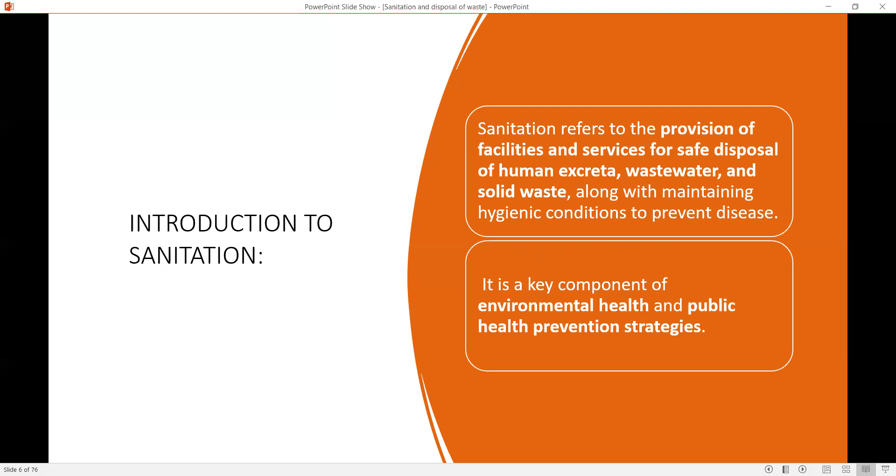Introduction to sanitation. Sanitation refers to the provision of facilities and services for safe disposal of human excreta, wastewater, and solid waste, along with maintaining hygienic conditions to prevent diseases. It is a key component of environmental health and public health prevention strategies.

Objectives: prevent spread of communicable diseases, protect water source from contamination, control vectors like flies, mosquitoes, rodents, maintain clean environment, and improve quality of life and dignity.

Next is solid waste and disposal. Solid waste refers to any unwanted product in our environment or from our daily items that is not a liquid or a gas. Improper disposal of solid waste affects the environment in many ways, such as pollution in air, water, soil, and blocked water drains.

It can spread diseases like dysentery, cholera, and vector-borne diseases such as malaria and dengue. Types of solid waste are municipal solid waste, non-municipal solid waste, and hospital waste or biochemical waste.

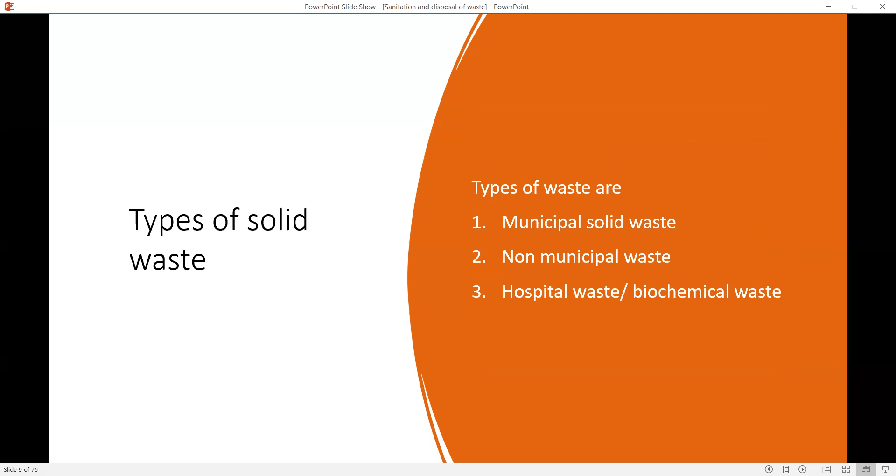Municipal solid waste includes all the items from homes and businesses that people no longer have any use for. These wastes are commonly called trash or garbage and include items such as food, paper, plastic, textile, leather, wood, glass, metal, sanitary waste in septic tank, and other wastes.

Municipal solid waste includes street waste, sanitation waste, construction and demolition debris, agriculture waste, institutional and commercial waste, and household waste. The composition of municipal solid waste includes metal at 9.5%, wood 8.3%...

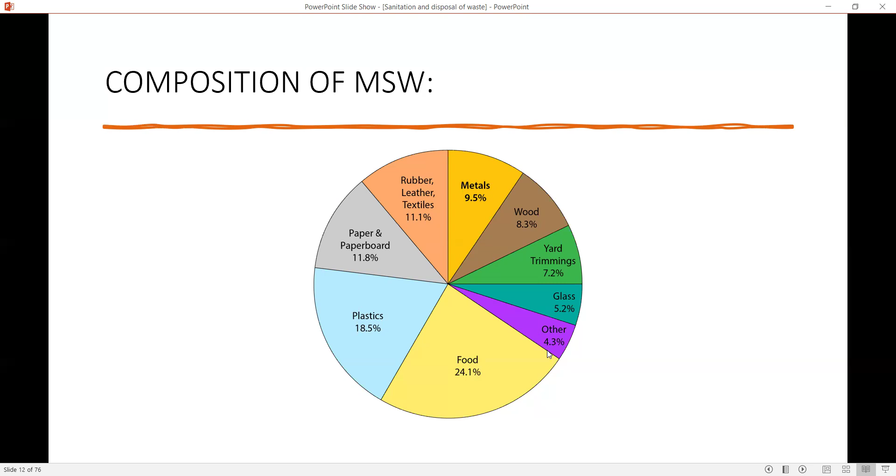...yard trimming 7.2%, glass 5.2%, food 24.1%, plastic 18.5%, paper and paperboard 11.8%, rubber, leather, textile 11.1%, and others at 4.3%.

Next is non-municipal solid waste: waste that is not created by community activities, residential or commercial establishments. It includes solid waste generated by the industries.

Next are the characteristics of solid waste, which are density, moisture content, size of waste constituents, calorific value, field capacity, permeability of compacted waste, compressibility, and chemical characteristics.

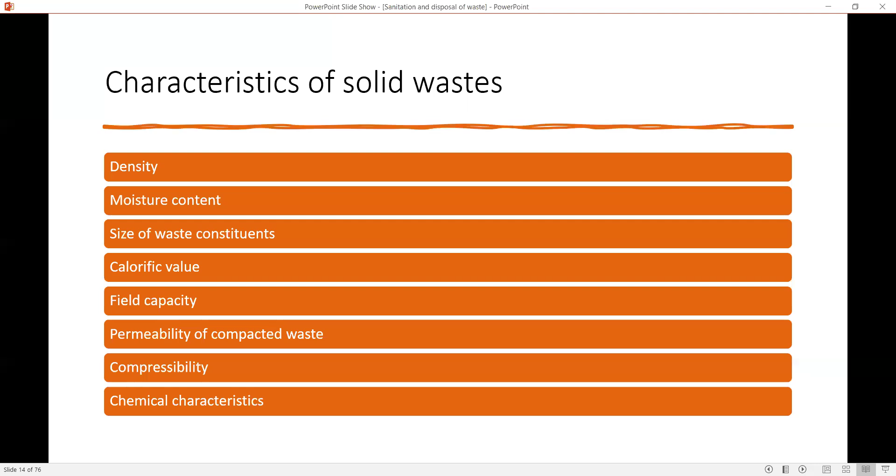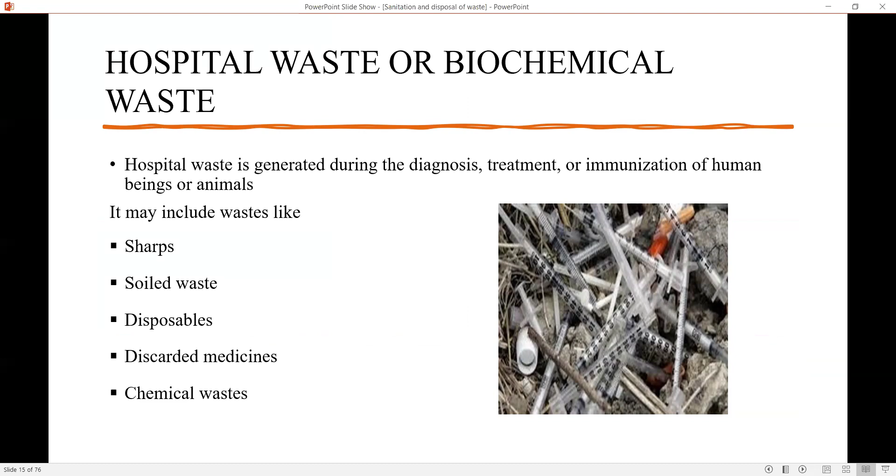Next is hospital waste or biochemical waste. Hospital waste is generated during the diagnosis, treatment, and immunization of humans or animals. It includes waste like sharps, soiled waste, disposables, discarded medicine, and chemical waste.

Next is the classification of solid waste, which is combustible or non-combustible, depending on whether they will burn or not. Depending on the inherent danger associated with its physical and chemical properties, solid waste can also be classified as either hazardous or non-hazardous.

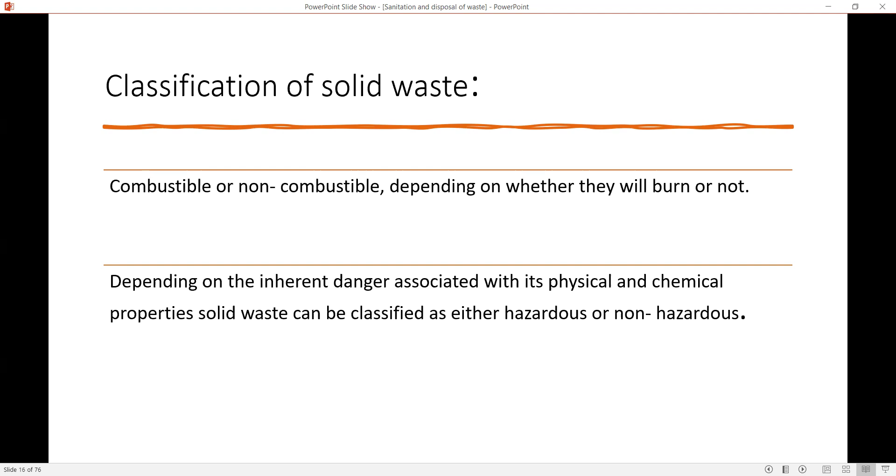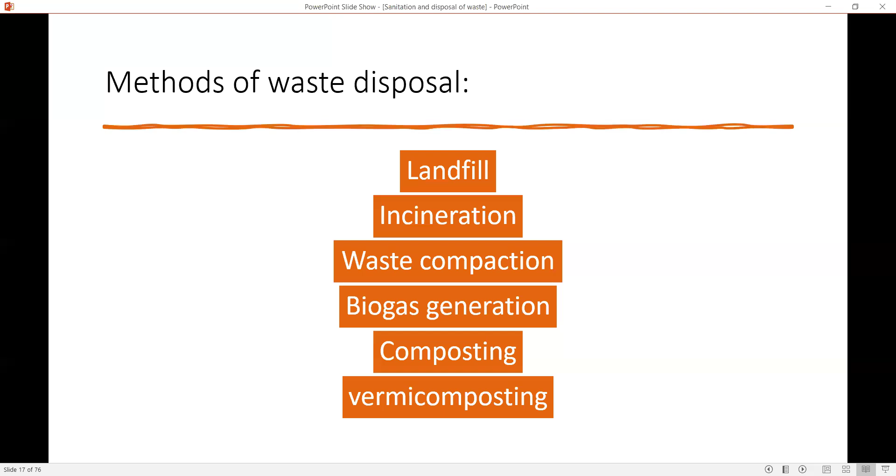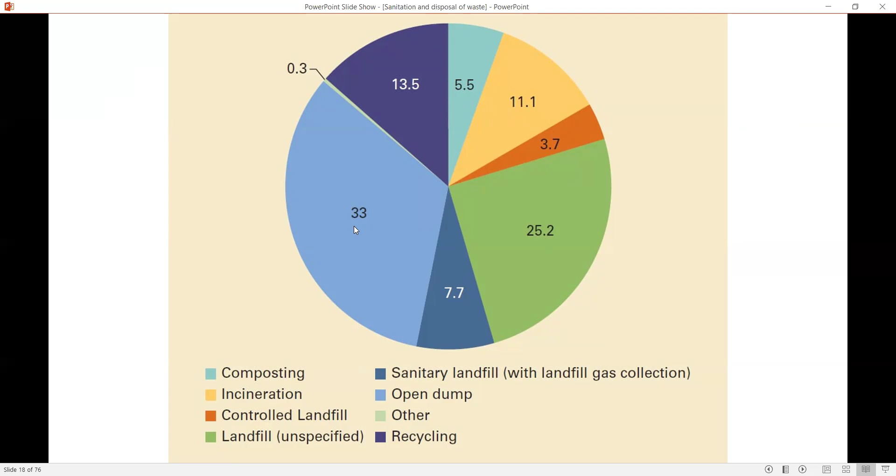Composting is 5.5%, incineration 11.1%, controlled landfill 3.7%, landfill 25.2%, sanitary landfill 7.7%, open dump methods 33%, and recycling 13.5%. So these are the methods: landfill, incineration, waste compaction, biogas generation, composting, and vermicomposting.

We will discuss these one by one. First is landfill. In this process, the waste that cannot be reused or recycled is separated out and spread as a thin layer in the low-lying areas across the city. A layer of soil is added after each layer of garbage.

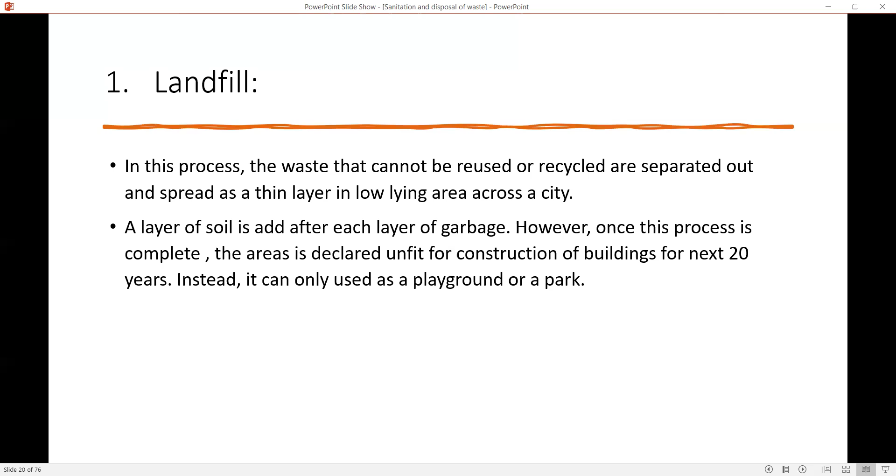However, once this process is complete, the area is declared unfit for construction of buildings for the next 20 years. Instead, it can only be used as a playground or a park.

Second is incineration. It involves controlled combustion of waste at a high temperature, converting waste into ash, gases, and heat, significantly reducing volume and weight. It is particularly useful for infectious waste, hospital waste, and hazardous material.

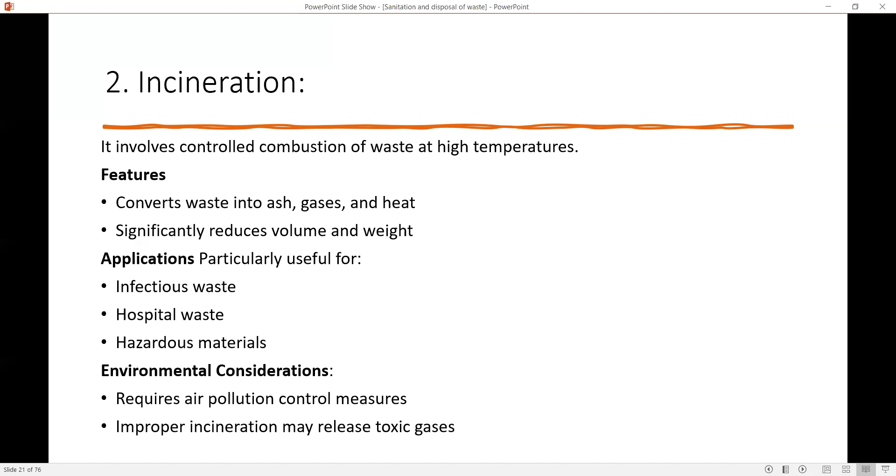Environmental considerations require air pollution control measures. Improper incineration may cause release of toxic gases.

This process reduces the volume of waste by 90% and is considered one of the most hygienic methods of waste disposal. In some cases, the heat generated is used to produce electricity. However, this process is not environmentally friendly due to the generation of greenhouse gases such as carbon dioxide and carbon monoxide.

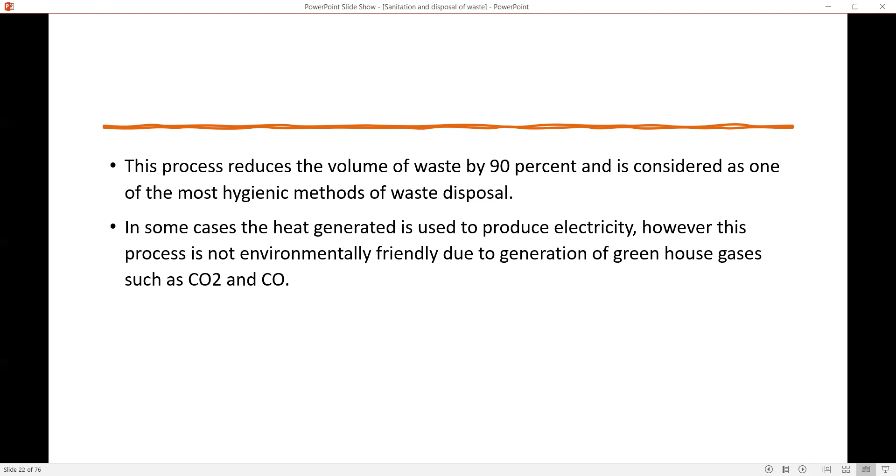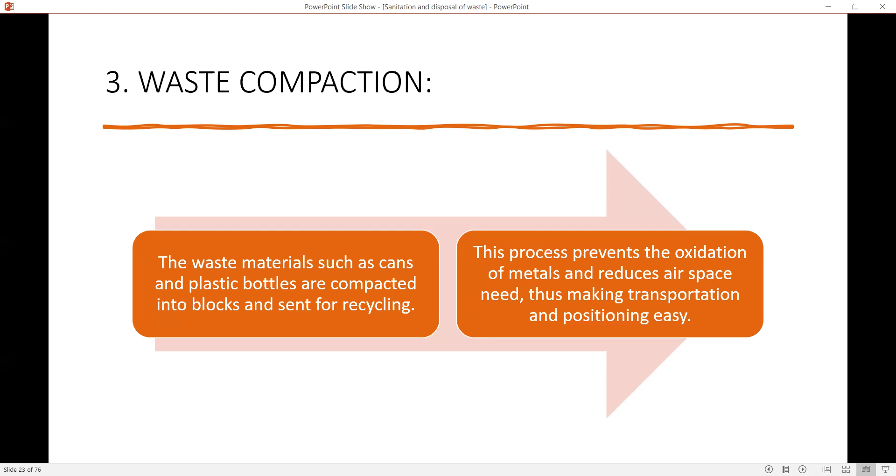Next is waste compaction. Waste materials such as cans and plastic bottles are compacted into blocks and sent for recycling. This process prevents the oxidation of metals and reduces airspace needed, thus making transportation and positioning easy.

Number four is biogas generation. Biodegradable waste is the type of waste originating from plant and animal sources, which may be degraded by other living organisms.

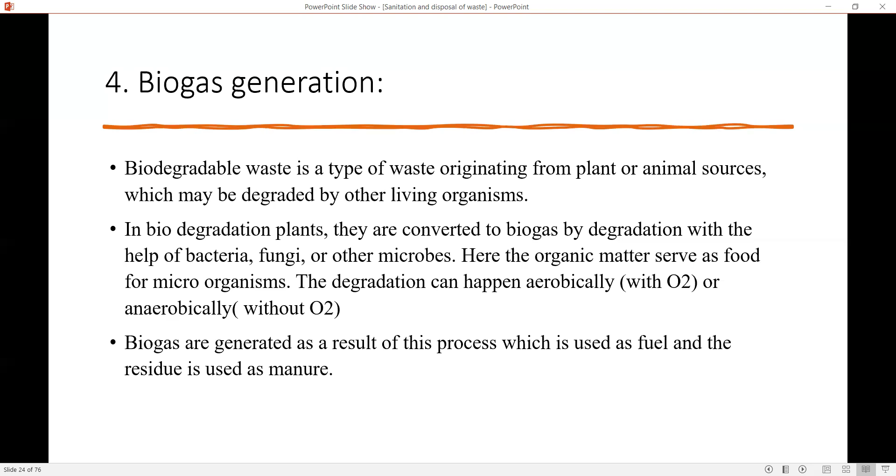In biodegradation plants, waste is converted into biogas by degradation with the help of bacteria, fungi, and other microbes. The organic matter serves as food for microorganisms. Degradation can happen aerobically with oxygen or anaerobically without oxygen. Biogas is generated as a result of the process, which is used as fuel and the residue is used as manure.

Next is composting. Composting is a natural process of rotting or decomposition of organic matter by microorganisms under controlled conditions. Raw organic materials such as crop residue, animal waste, food garbage, some municipal waste, and suitable industrial waste enhance its suitability for application to soil as a fertilizing resource after undergoing composting.

Under anaerobic composting, anaerobic microorganisms dominate and develop intermediate compounds including methane, organic acids, hydrogen sulfide, and other substances. In aerobic composting, aerobic microorganisms break down organic matter and produce carbon dioxide, ammonia, water, heat, humus, and relatively stable organic end products. The benefits of composting are preventing soil erosion, promoting healthier plant growth, conserving water, reducing waste, and combating climate change.

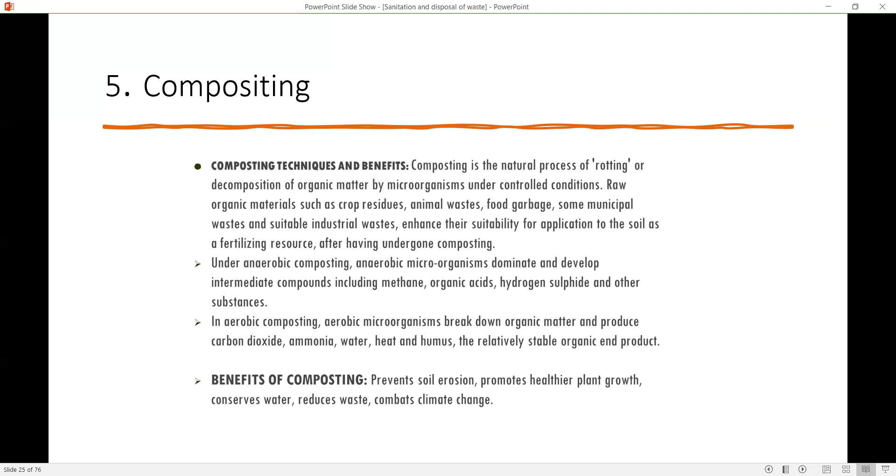Next is vermicomposting. Vermicomposting is the process of using worms for degradation of organic matter into nutrient-rich manure. Worms consume and digest the organic matter. The byproduct of the digestion, which is excreted out of the worm, makes the soil nutrient-rich, thus enhancing the growth of fungus and bacteria. It is also far more effective than traditional composting.

Next is the purpose of waste disposal, which is to prevent the spread of diseases like cholera, typhoid, and dysentery, to protect public health, to prevent air, water, and soil pollution, to control breeding of flies, mosquitoes, and rodents, avoid foul smell, maintain cleanliness and aesthetics of surroundings, prevent contamination of food and water, ensure safe disposal of hazardous waste, reduce volume of waste, promote recycling and reuse of material, recover useful products to improve community hygiene and quality of life, and support environmental protection and sustainability.

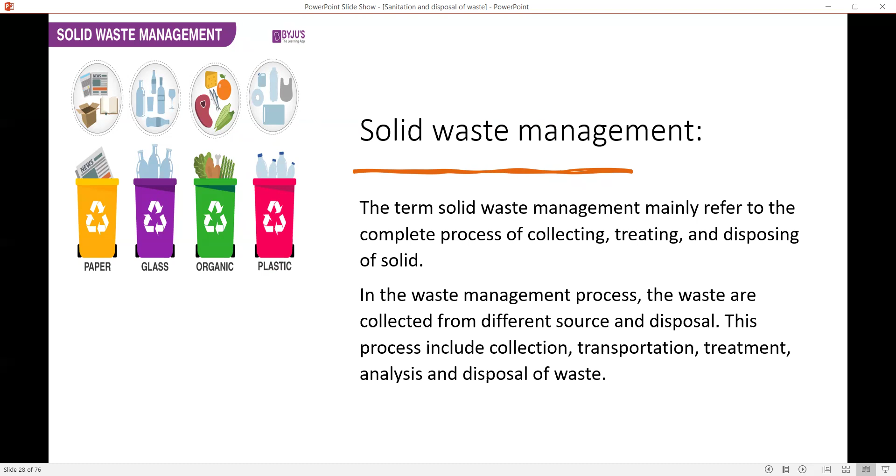Next is solid waste management. The term solid waste management mainly refers to the complete process of collecting, treating, and disposing of solid waste. In the waste management process, waste is collected from different sources and disposed of. This process includes collection, transportation, treatment, analysis, and disposal of waste.

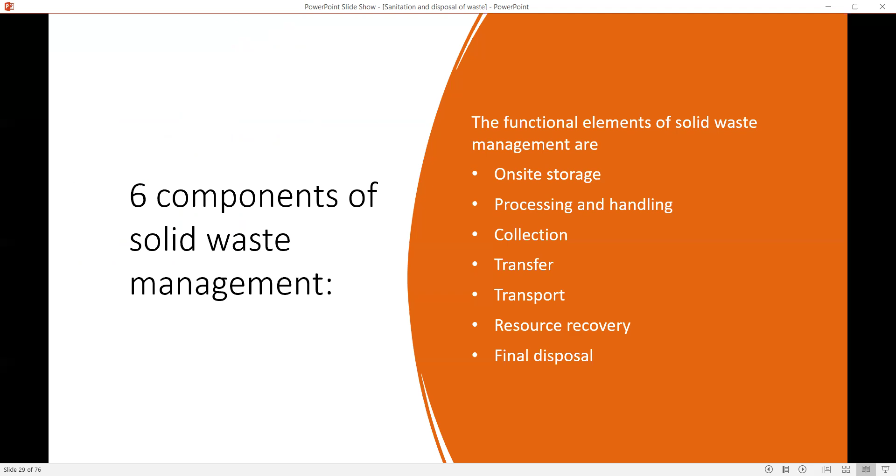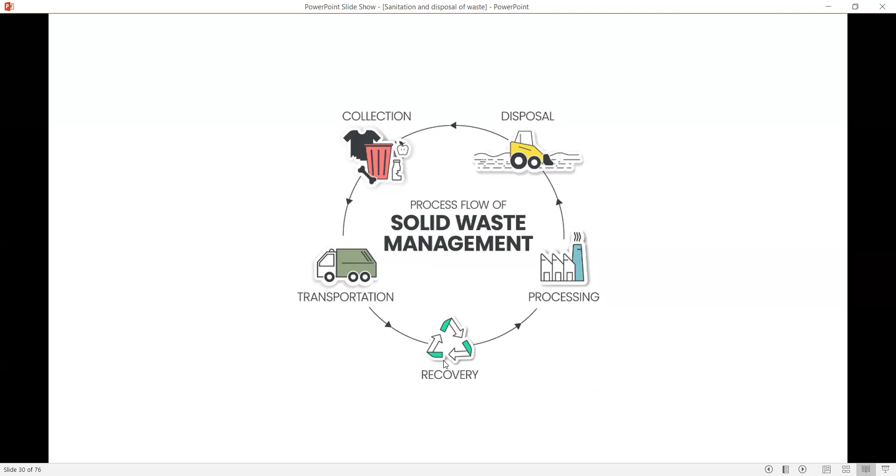Next are the components of solid waste management. The functional elements of solid waste management are on-site storage, processing and handling, collection, transfer, transportation, resource recovery, and final disposal. This image shows the process: collection, transportation, recovery, processing, and disposal.

The 7 R's of solid waste management are: refuse, say no to unnecessary items; reduce, use less and waste less; reuse, use items again; repair, fix and mend; recycle materials; recover; and rethink.

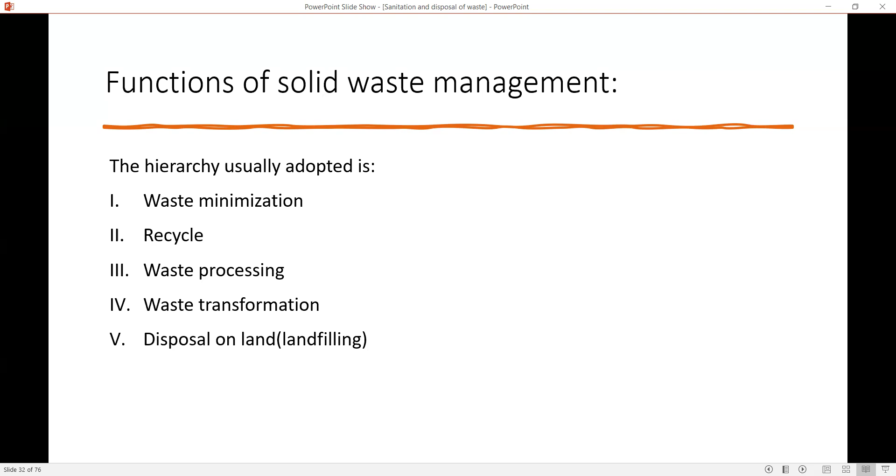Next is the functions of solid waste management. The hierarchy usually adopted is waste minimization, recycling, waste processing, waste transformation, and disposal on land.

Next is integrated solid waste management. It is a comprehensive framework that manages municipal solid waste by combining source reduction, recycling, composting, and safe disposal to maximize efficiency and minimize environmental impact. It promotes sustainability by prioritizing waste prevention, resource recovery, and reduction of pollutants.

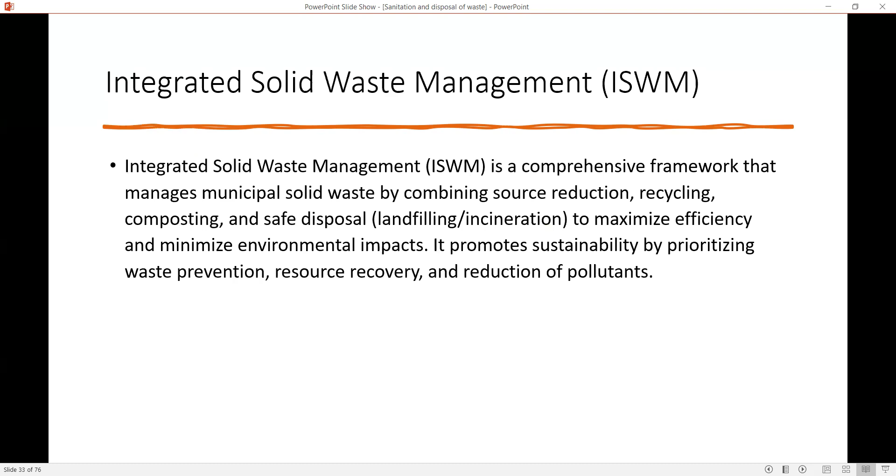The key components of integrated waste management are: strategies aimed at decreasing waste generation, such as designing products with less packaging, recycling and composting; systematic collection, sorting, and reprocessing of materials like metal, paper, plastic, and organic waste; waste transportation, which is efficient collection and transportation to processing or disposal sites; and waste disposal, the final disposal of non-recyclable material through properly engineered sanitary landfill or thermal treatment.

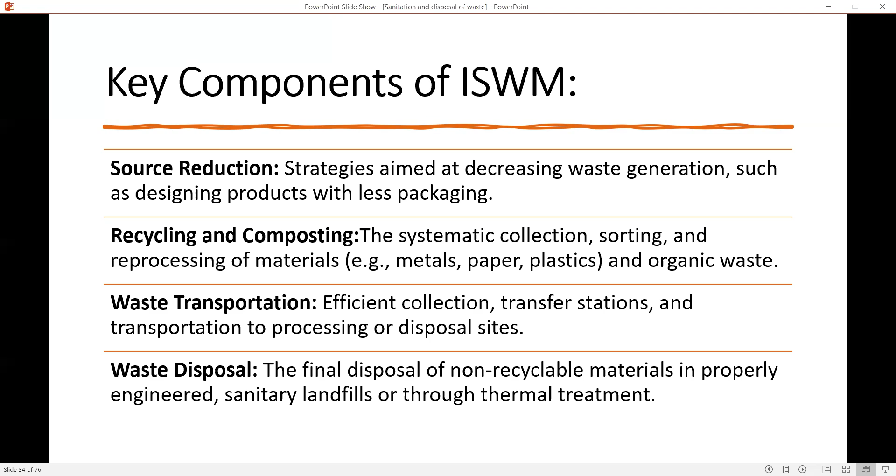Challenges include lack of infrastructure, lack of human resources, insufficient budget for solid waste management, limitation of technology, lack of participation in waste segregation at the source due to low awareness, low waste collection fees, and institutional and policy issues for solid waste management. Lack of infrastructure includes inadequate sewerage systems in rural and peri-urban areas, absence of proper drainage networks, poorly constructed and non-functional toilets, and limited wastewater treatment plants.

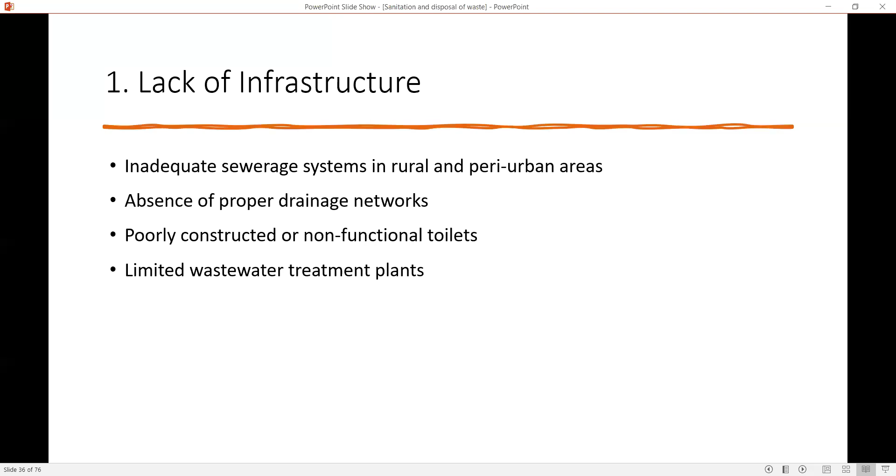Open defecation practices are still common in rural communities due to poverty, cultural habits, and lack of toilets, leading to contamination of soil and water, which is a major barrier to achieving SDG 6.

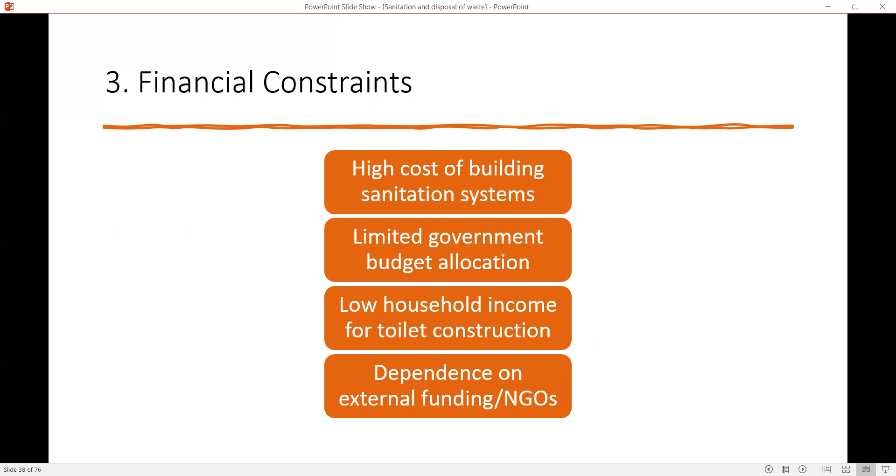Financial constraints include high cost of building sanitation systems, limited government budget allocation, low household income for toilet construction, and dependence on external funding and NGOs.

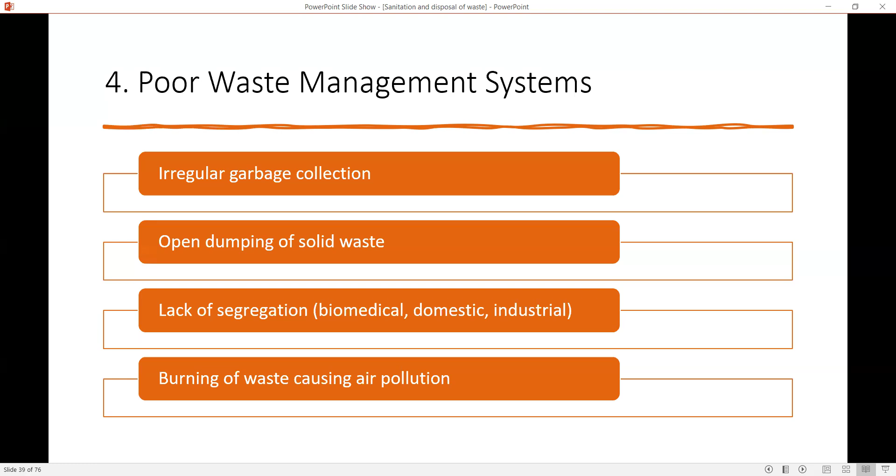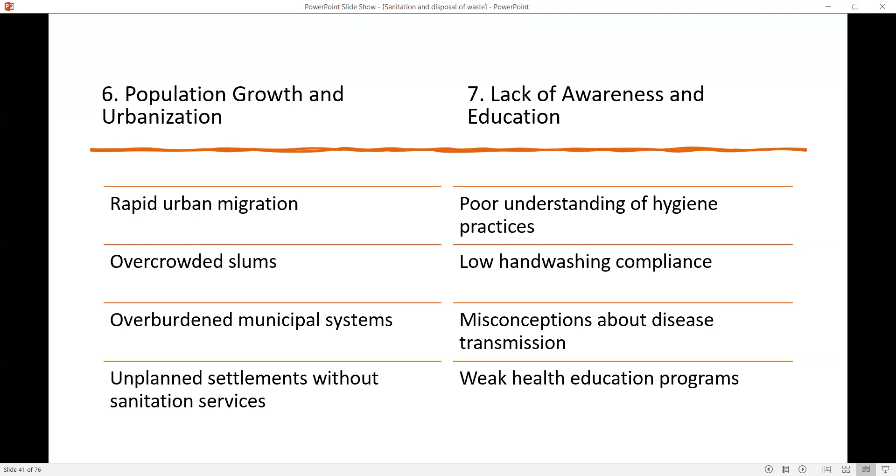Population growth and urbanization bring rapid urban migration, overcrowded slums, overburdened municipal systems, and unplanned settlements without sanitation services. Lack of awareness and education includes poor understanding of hygiene practices, low hand-washing compliance, misconceptions about disease transmission, and weak health education programs.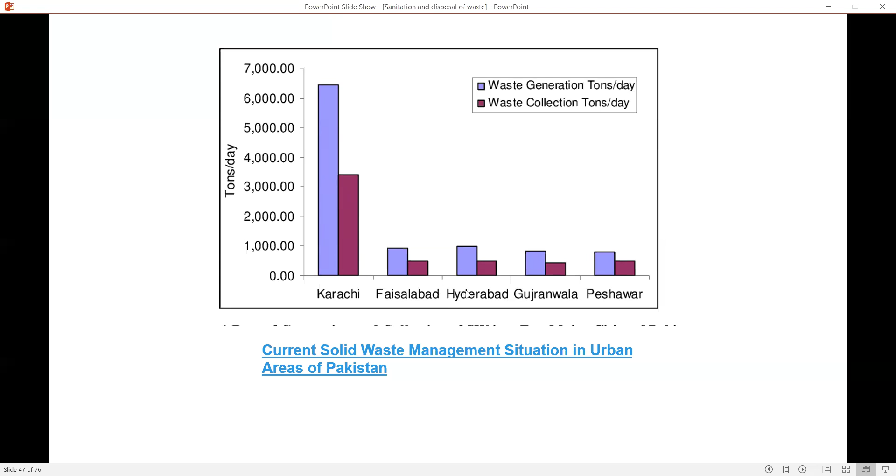Waste generation is shown by the purple line, while waste collection, shown separately, is less than waste generation in Karachi, Faisalabad, Hyderabad, Gujranwala, and Peshawar.

Strategies for reducing greenhouse gas emissions from municipal solid waste management in Pakistan.

Next is Chief Minister Maryam Nawaz Sharif. The Maryam Nawaz Sharif Suthra Punjab, or Clean Punjab initiative, marks Pakistan's largest province-wide sanitation and waste management program. It presents a significant step toward environmental sustainability and public health improvement in Punjab. The campaign aims to achieve zero waste Punjab within three months, encompassing both urban and rural areas. The impacts of Suthra Punjab include cleaner streets, cities, towns and villages, restoration of public gathering spaces, improved air quality, healthier living conditions, enhanced living standards, positive impact on tourism, and generation of employment opportunities.

Next is the septic tank. A septic tank is a watertight underground chamber used for the primary treatment of domestic sewage in areas without a sewage system. Its purpose is to collect and treat household sewage, separate solids from liquid, and allow anaerobic decomposition of organic matter.

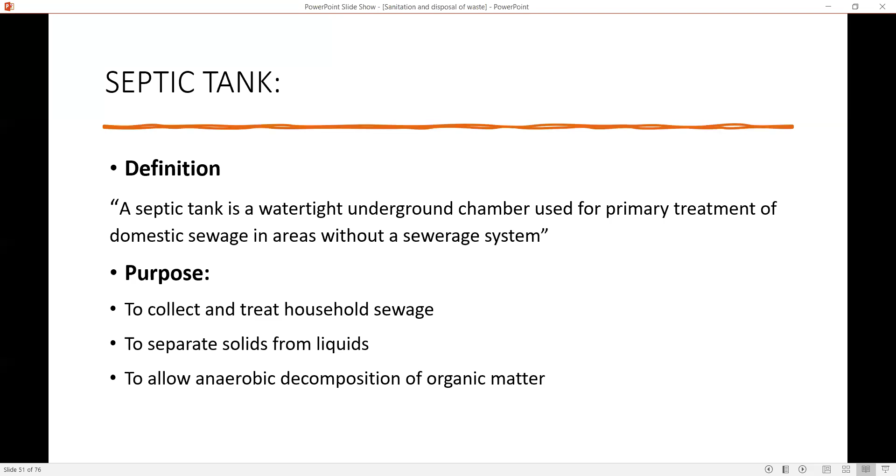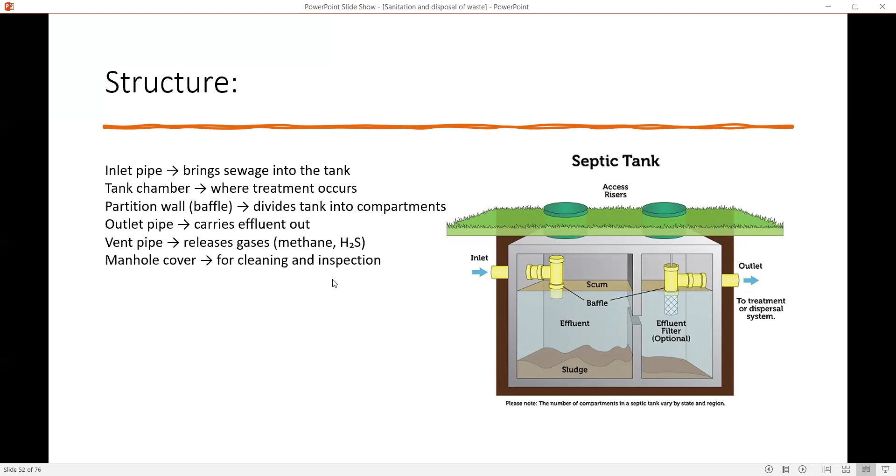The structure of the septic tank includes an inlet pipe which brings sewage into the tank chamber where treatment occurs, a partition wall dividing the tank into two compartments, an outlet pipe carrying the effluent out, a vent pipe releasing gases like methane and H2S, and a manhole for cleaning and inspection.

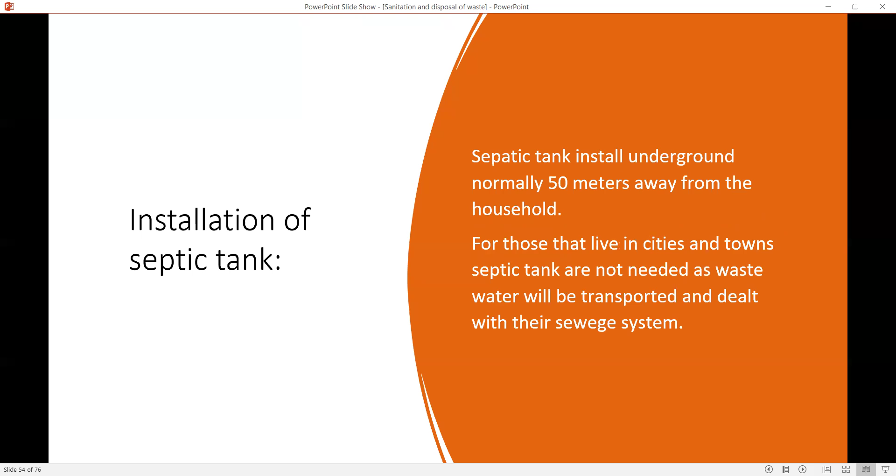The common types of septic systems are gravity, pressure distribution, sand filter, and mound systems. Septic tanks are installed underground, normally 50 meters away from the household. For those living in cities and towns, septic tanks are not needed, as wastewater is transported and dealt with through the sewage system.

The functioning of the septic tank: step one is sedimentation, where heavy solids settle at the bottom, called sludge, and light material like oil and grease float, called scum. Step two is anaerobic digestion, in which bacteria break down organic matter and produce gases like methane, carbon dioxide, and H2S. Step three is effluent discharge, where partially treated liquid flows out to a soak pit or drainage field for further purification.

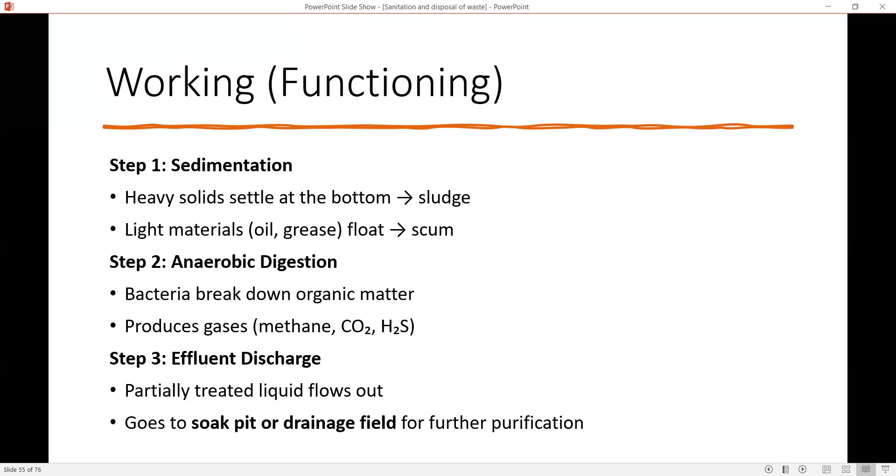The layers in the septic tank: the top layer is the scum, the middle layer is the clear liquid effluent, and the bottom is the sludge layer.

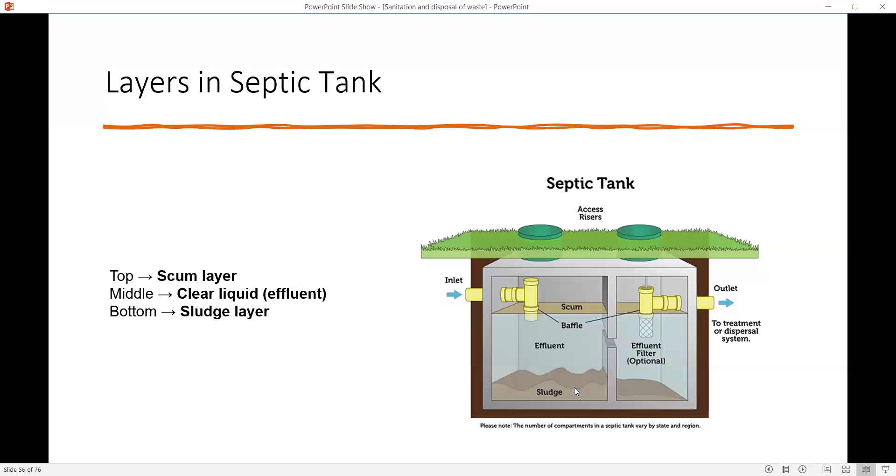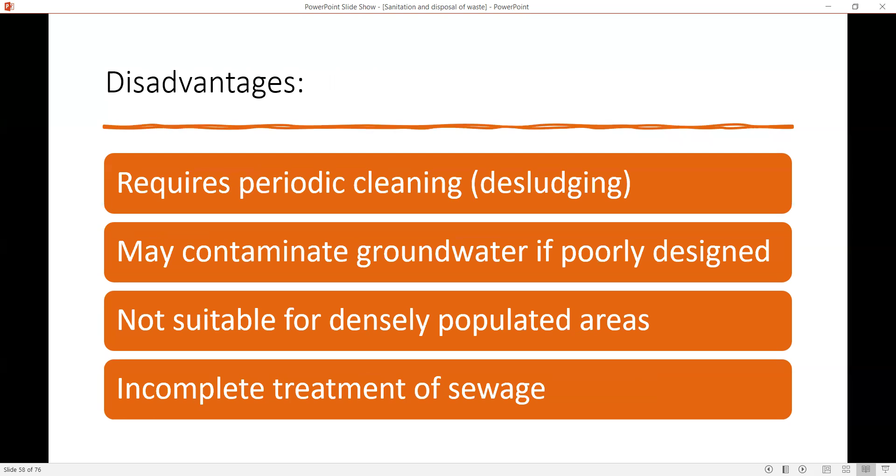Advantages of the septic tank: it is simple and economical, suitable for rural and peri-urban areas, requires no extensive sewer system, and reduces pollution if properly maintained. Disadvantages of the septic tank: it requires regular cleaning, may contaminate groundwater if poorly designed, is not suitable for densely populated areas, and provides incomplete treatment of sewage.

Maintenance requires regular desludging every 2 to 3 years, avoiding disposal of non-biodegradable waste, and ensuring proper ventilation.

Recent updates: the solid waste management sector in Pakistan has a refined roadmap for policymakers. Pakistan could strengthen its solid waste management and, by doing so, reduce its greenhouse gas emissions. It provides guidance on improving and expanding waste collection and disposal services for municipal, industrial, electronic, and hospital waste.

It outlined the waste management options and key considerations in setting up a waste management system. Next is the National Waste Management Strategy.

Pakistan does not yet have a single unified solid waste policy, but waste management is guided by the National Hazardous Waste Policy 2022, National Environmental Policy, National Sanitation Policy, and Provincial Waste Management Rules. The 2022 policy acts as the umbrella framework for waste management, especially hazardous waste.

Objectives of the national strategy include prevention and reduction of waste generation, environmentally safe handling and disposal, protection of public health and environment, and compliance with international conventions.

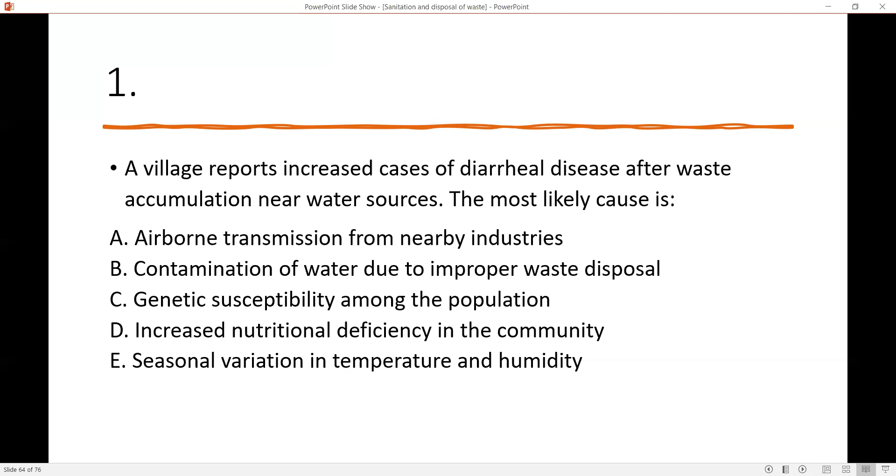Next are the MCQs. MCQ number 1: A village reports increased cases of diarrheal diseases after waste disposal accumulation near the water source. The most likely cause: A. Airborne transmission from nearby industries. B. Contamination of water due to improper waste disposal. C. Genetic susceptibility among the population. D. Increased nutritional deficiency in communities. E. Seasonal variation in temperature and humidity. Answer: B is the right option.

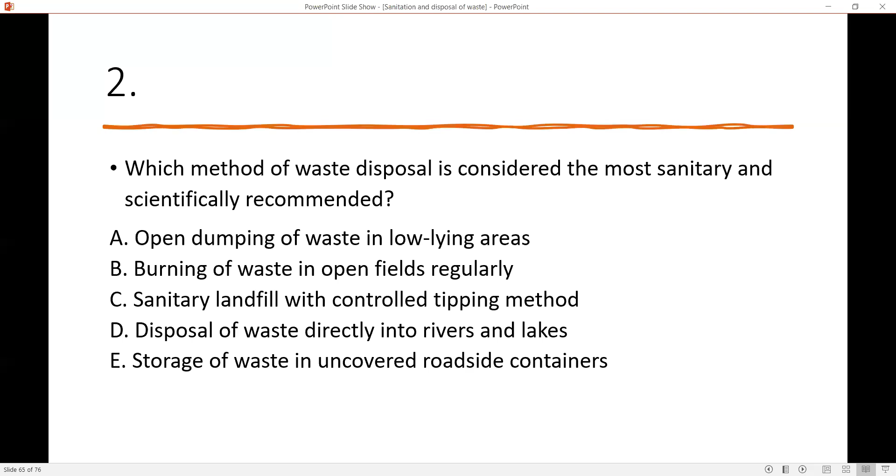MCQ number 2: Which method of waste disposal is considered the most sanitary and scientifically recommended? A. Open dumping of waste in low-lying areas. B. Burning of waste in open fields regularly. C. Sanitary landfill with controlled tipping method. D. Disposal of waste directly into rivers and lakes. E. Storage of waste in uncovered roadside containers. Answer: C is the right option.

MCQ number 3: In a composting system, the primary role of microorganisms is to A. Convert inorganic waste into synthetic material. B. Break down organic matter to stable humus. C. Increase moisture content of the waste material. D. Prevent formation of methane gas in the pit. E. Enhance growth of disease-causing pathogens. Answer: B is the right option.

MCQ number 4: Which waste disposal method is most suitable for infectious hospital waste? A. Open dumping in municipal landfill areas. B. Composting with domestic biodegradable waste. C. Controlled incineration at high temperature. D. Disposal into the sewage system without treatment. E. Burial in shallow pits near residential areas. Answer: C is the right option, controlled incineration at high temperature.

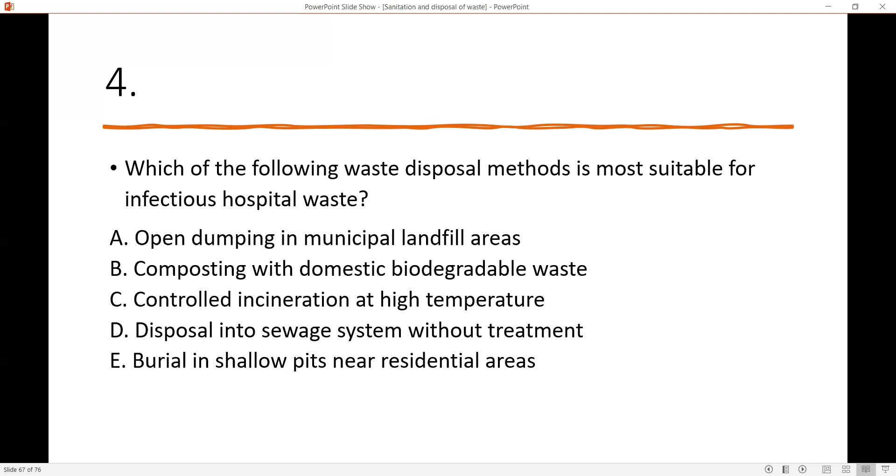MCQ number 5: Which of the following is not a function of solid waste management? A. Collection of waste from various sources regularly. B. Segregation of waste into different categories. C. Transportation of waste to disposal safely. D. Promotion of open dumping for quick disposal. E. Treatment and final disposal of waste scientifically. Answer: D is the right option.

MCQ number 6: A rural village reports frequent diarrheal outbreaks. Investigation shows waste is dumped near a shallow well used for drinking water. The most appropriate intervention is A. Promote open burning of waste near the water source. B. Shift waste disposal to a sanitary landfill away from the well. C. Increase use of chemical fertilizer in agriculture. D. Encourage storage of waste inside the household longer. E. Discharge liquid waste directly into the same well. Answer: B is the right option.

MCQ number 7: A septic tank is not desludged for many years. The most likely consequence is A. Increased efficiency of anaerobic digestion process. B. Overflow of untreated sewage into the surroundings. C. Complete sterilization of pathogens inside the tank. D. Conversion of sludge into high quality compost. E. Reduction in gas production due to inactivity. Answer: B is the right option.

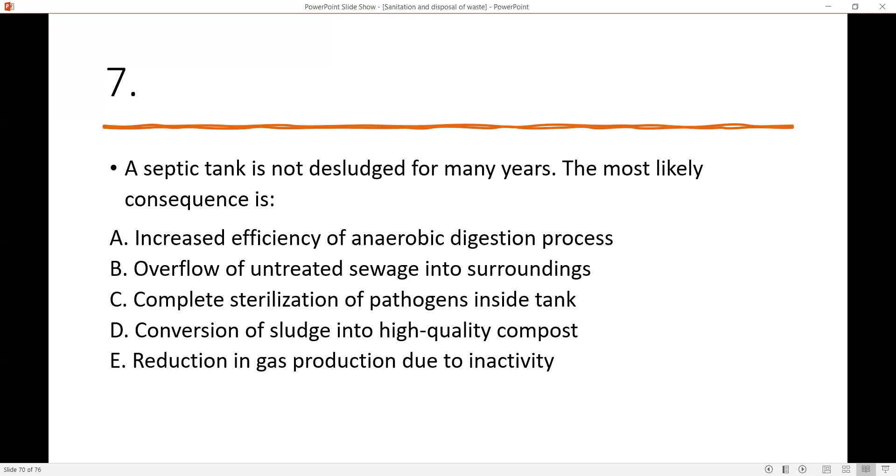MCQ number 8: Which of the following best represents sustainable waste management? A. Increase waste production with rapid disposal method. B. Open dumping combined with periodic burning practice. C. Reduce, reuse, recycle with resource recovery approach. D. Disposal of all waste into rivers and water bodies. E. Storage of waste without treatment for long duration. Answer: C is the right option, reduce, reuse, recycle with the resource recovery approach.

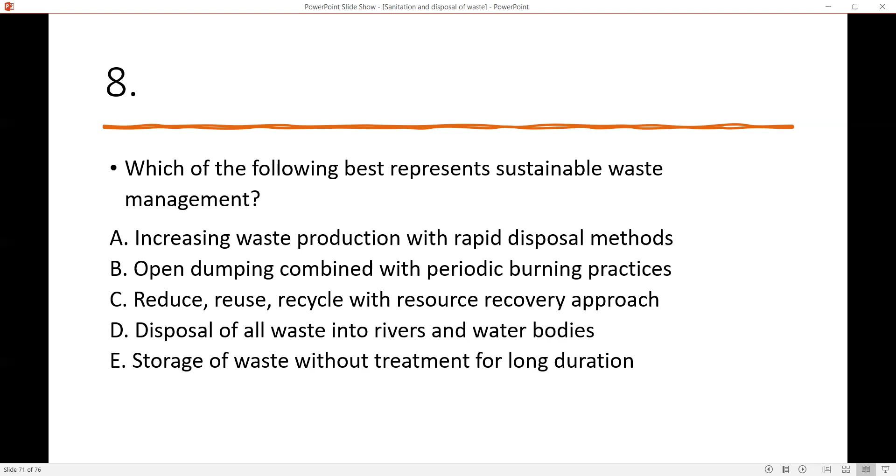MCQ number 9: A septic tank mainly functions by A. Aerobic oxidation of sewage using oxygen supply. B. Chemical disinfection of pathogens in the wastewater. C. Anaerobic digestion of organic matter in the sewage. D. Filtration of solid waste through the sand layer. E. Evaporation of liquid waste under sunlight. Answer: C is the right option.

MCQ number 10: The concept of 3R in waste management includes A. Remove, replace, restore material efficiently. B. Reduce, reuse, recycle waste products efficiently and effectively. C. React, reform, reconstruct environmental system. D. Repair, rebuild, reorganize waste structure. E. Recover, reproduce, reinvest waste material. Answer: B is the right option.